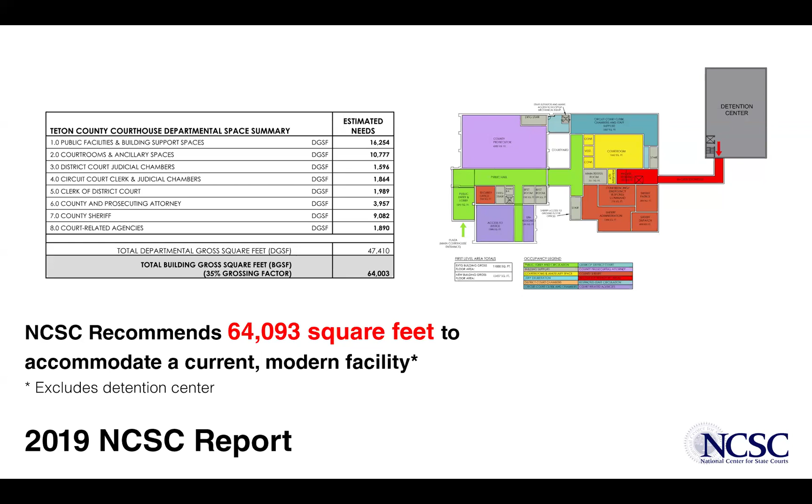So in 2019, the National Center for State Courts performed a departmental space needs assessment where they took into account the spaces that are in the existing courthouse and what growth projection might occur. And I think that the modest growth projections were included in this, but effectively came up with a number of around 64,000 square feet that a modern, contemporary, right-sized courthouse would accommodate. The current courthouse is closer to 32,000 square feet.

They also performed an assessment on security. And they came up with a large list of inefficiencies that don't meet current standards and current codes. One of the most significant ones is the lack of accessibility, ADA access within the facility, and deferred maintenance needs, specifically along the energy systems and mechanical systems, which are nearing the end of their life cycle.

The other significant one, the last bullet point I just want to touch on, is a 911 call dispatch center that is currently operating from the county's EOC, but also from their current jail. But the improvements to have this emergency response dispatch center were also top of the priority list on this assessment.

So with that assessment, the county went ahead and put out a national search to hire a design team to begin developing a range of concepts to understand renovation options, addition options, or even new building options. So that's when we came on board in 2020. So we took that assessment that was started, and we began exploring options and upgrades.

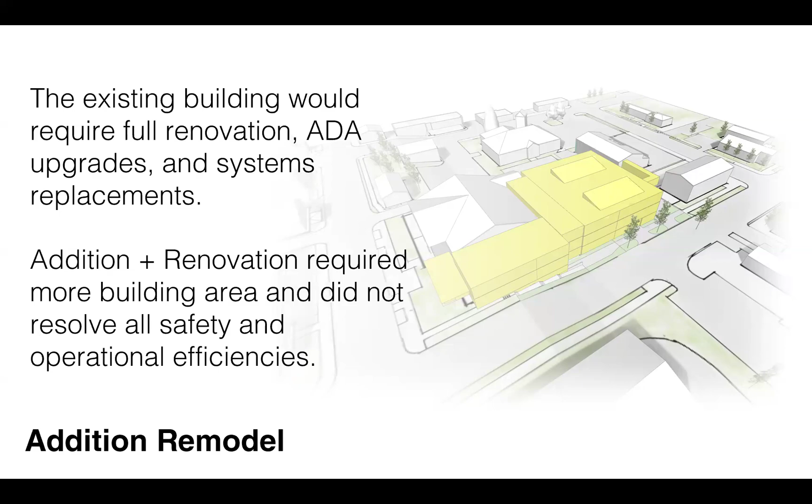What we did find is that the existing building would not be able to accommodate all the ADA upgrades and system upgrades. And so we did begin looking towards addition and renovation. And we did also look toward phasing the project with an addition and renovation option. The ask that the county gave to the design team, or the charge and the challenge, was what could be done in the short term. What are the short-term solutions to improve this building modestly?

So we did come up with a near-term plan. There was funding available at the time in 2021 to improve the building envelope. There were also security capital funds to hit the most significantly impactful security components, and that would be a new vestibule and public entry, securing the judges and staff entry, and then using technology to improve security throughout the building. A lot of the technological security improvements were acted upon.

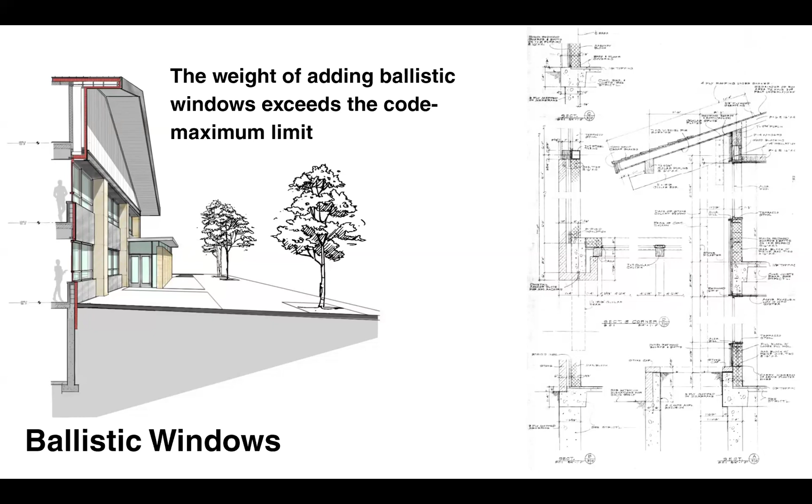What we found through this study is we began developing strategies to improve the exterior envelope and energy efficiency of the building, in addition to adding ballistic windows, an important component when you have public servants, judges, county attorneys right on the street level. The ballistic windows and the envelope improvements were going to add a lot of weight to the building. And that weight, we found, is going to be very hard to accommodate.

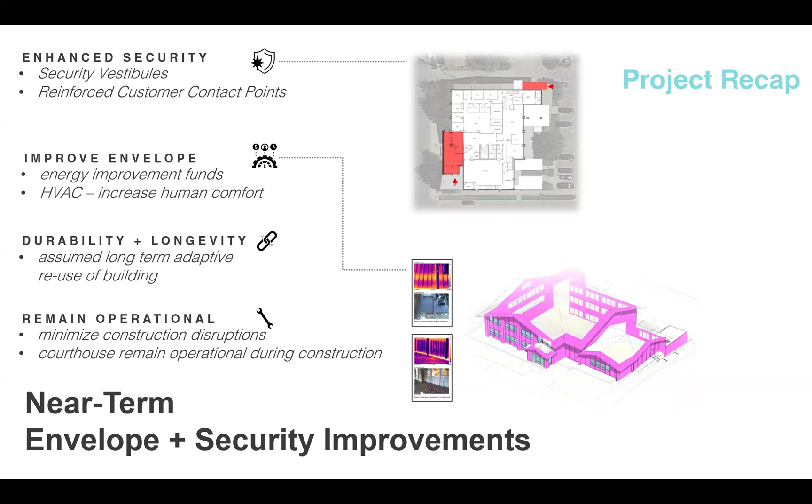So at that time, as we began developing concept designs, we brought on a CMAR, which is a construction manager at risk. It's a general contractor who comes on board early to help validate costs and to help plan for constructability. So when we did that, we began to look at what we could do to the envelope. That spurred an analysis of what the structure could handle within upgrades, replacing mechanical systems in the attic.

So here's a photo of one of our engineers exploring the attic. You can see mechanical systems up there and the structure up there as well. What that ultimately did, it uncovered the need for a seismic evaluation. Replacing the mechanical systems out of the attic certainly required opening up the roof, putting in a new air handling unit and new mechanical systems, or at least replacing components of them that were at the end of their life cycle. Doing that did require our engineering team and us to evaluate the weights of added equipment and added envelope.

So what we found, KL&A was the structural engineer on board. What the Tier 1 and Tier 2 seismic evaluation uncovered was a few things. One, when the building was built in the 1960s, no seismic performance code was established. So this was pre-codification of seismic concerns, seismic codes, effectively, that govern how buildings of this type need to be built today.

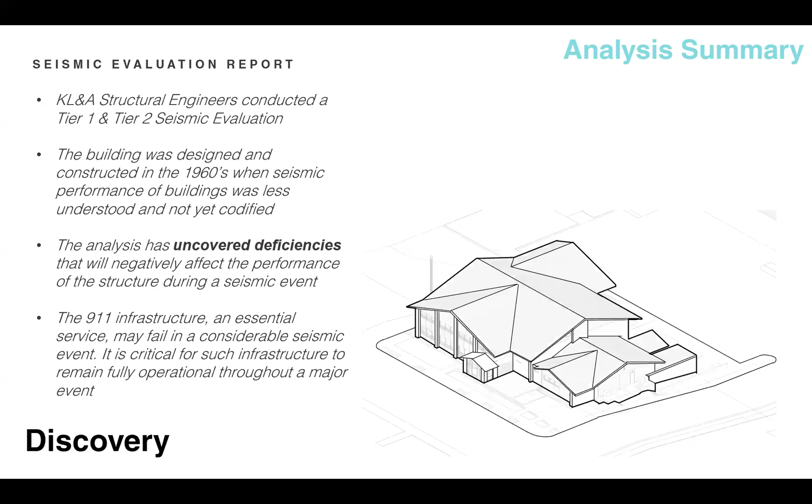It also uncovered the fact that parts of the building itself, the concrete masonry units that fill the building, were not built as designed. Specifically, what we found was that the concrete masonry block was called out in the original design documentation in the 1960s to be fully grouted and have steel reinforcement rebar through them. Well, the rebar was put in. We found that the grout, which is the binding element, was not put in a number of walls within the building. So that was discovered through a forensic exploration.

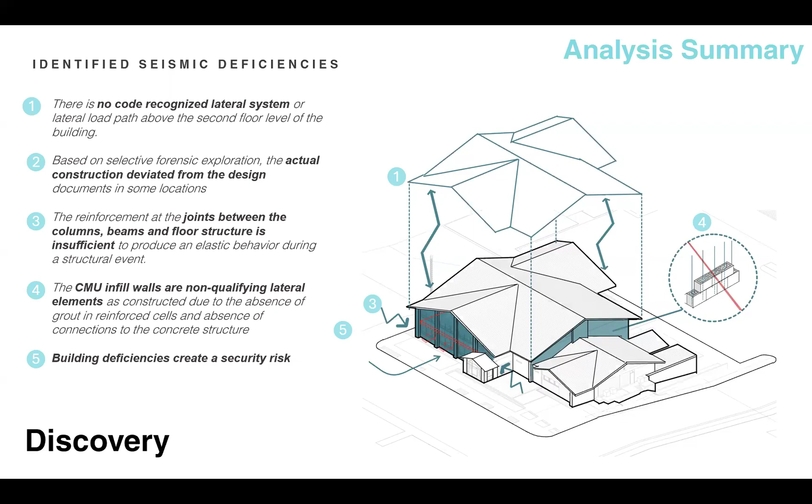And I think those building deficiencies certainly create a higher security risk. So we did dial in a bit more and uncovered which walls and where those may have occurred. But the exterior walls, the primary district court, the means of egress components, meaning the interior stairwell and elevator shaft, those all had concrete masonry block that were not grouted.

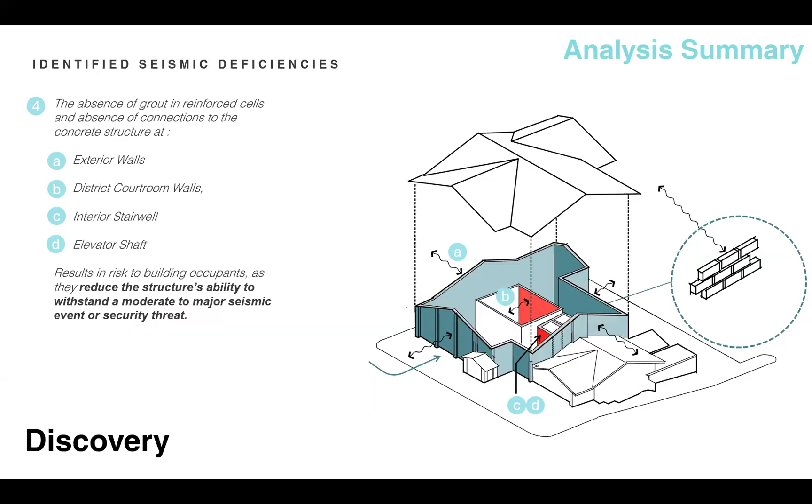So with that said, it became very hard to justify major improvements on a building that was this deficient. And again, I want to stress on this call, the building has stood for over 40 years, and no event has put this building at risk. But it does not meet current codes and current expectations of a modern courthouse today.

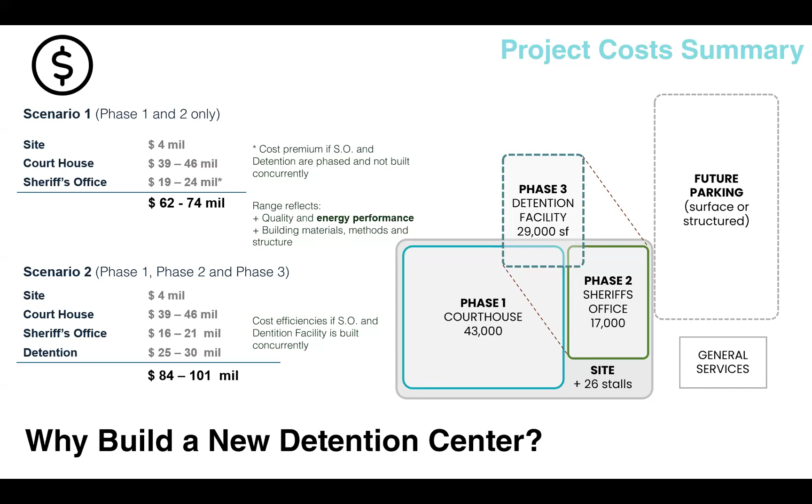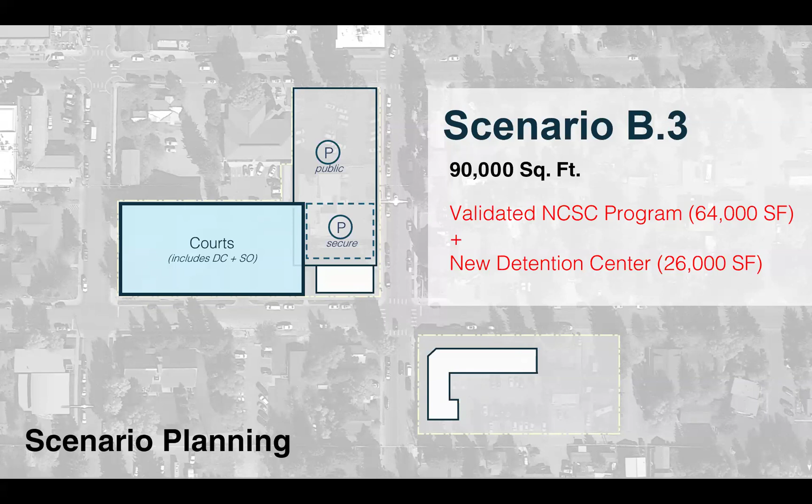So we did model and have a projection for a cost model of this initial phase. We began to develop that scenario B.3 at this point; we went through various iterations of this scenario B. When we brought in a new detention center and we validated the National Center for State Courts program, it does result in roughly a 90,000 square foot building. We do know today that size of a building might be a bit out of the mark of what a budget could sustain. And so we have reduced that overall square footage amount through additional studies and additional planning.

At the same time, we were given direction to explore sustainable strategies for the project. Building a new building like this, we did conduct environmental design workshops with a number of stakeholders, county representatives. This was summer of 2023; we met within these workshops to try to establish a decision-making framework and goals to then really be able to review and, if possible, select a rating system.

I'm sure many of you may have heard of different systems. There's LEED, there's Green Globes, there's the CORE and the Living Building Challenge. So there are a number of options, and really wanting to align the design metrics and measures to really have an effective outcome.

So it was at that point that a lot of the seismic tier 1 and tier 2 seismic evaluations came to a front, and it became clear that a new building was the best course of action as decided on by the county. And we put a pause. We were asked to pause on the design so the county could evaluate funding options and evaluate ways to make it a reality.

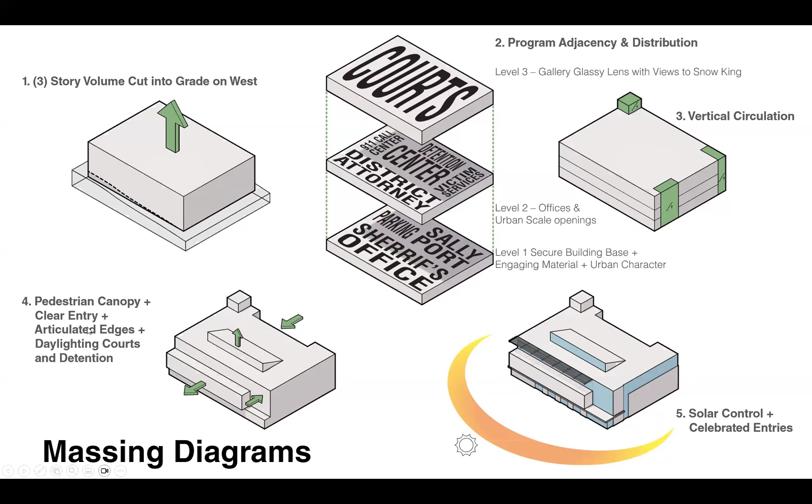There's a lot of examples here in Jackson, the historic district in particular, where the building feels like a 1 or 2-story building and the rest of the mass steps back. And so that's what these diagrams are showing: as you resolve circulation and public flow to the courts gallery and courts above, finding opportunity to step back the building to make it feel and have a really wonderful pedestrian experience that is in line with the massing that you would see within the town of Jackson.

But I think these ideas on the left, these themes, are very important, not just to the town, but in a once in a generation investment in a building like this. All are very much at play. And perhaps should have been listed first is the Jackson identity and context. The projects you see on the screen, many of them are in Jackson.

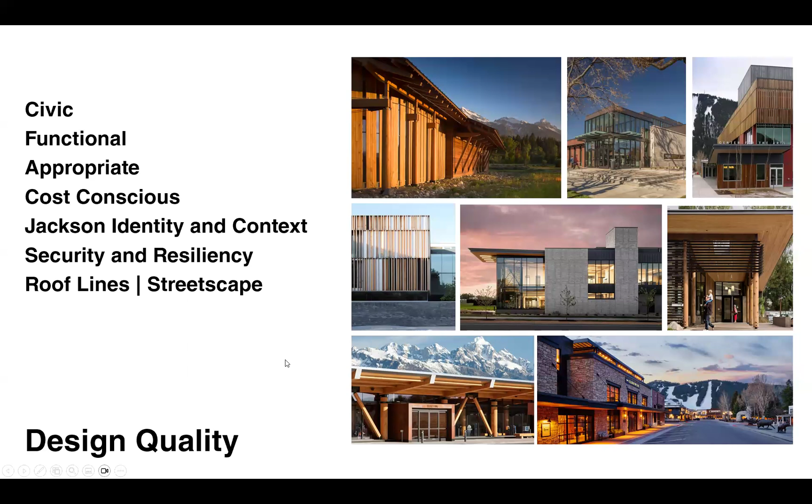Others are Justice Center examples and buildings that have a high level of security and resiliency and a civic quality and character to them. So combining the warmth, the natural material of Jackson identity and context with a civic, functional, and secure building type would be the architecture that the team and the county is aspiring towards.

A quick set of plan diagrams on level 1, 2, and 3, just to communicate spaces, and this is a concept level bubble diagram that tells you what's in the building and how things are located and critical adjacencies. So again, on level 1, you'd have the main entry on Simpson, and then moving towards the sheriff's office would be located on level 1. By the time you're on King Street, that's partially buried within the hillside that runs down Simpson.

You'd have a booking area that would rise up directly towards the detention housing. And then the back on the alley side would be the secure parking and Sallyport in the gray. Up on level 2, you would have the detention center tucked in the middle and the back of the building. And to be clear, there would be no connectivity between the detention center and these other programs.

The detention center would effectively be a double corridor standalone, and it would be accessed from the Sallyport and from the sheriff's booking area. And then the other office spaces that are located around the county attorney, dispatch 911 call center, and the other services related to the courts, for example, the victim services.

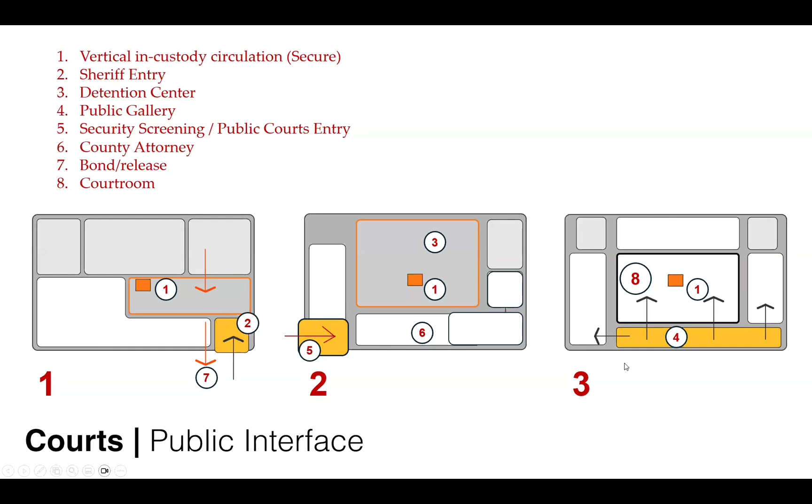So with that, I think that is the extent of the content, and we are here open to answer questions and check the chat. I know it doesn't look like there's a lot of chatter in the chat, but that concludes kind of the pre-prepared update that the design team had. So I'll pause there.